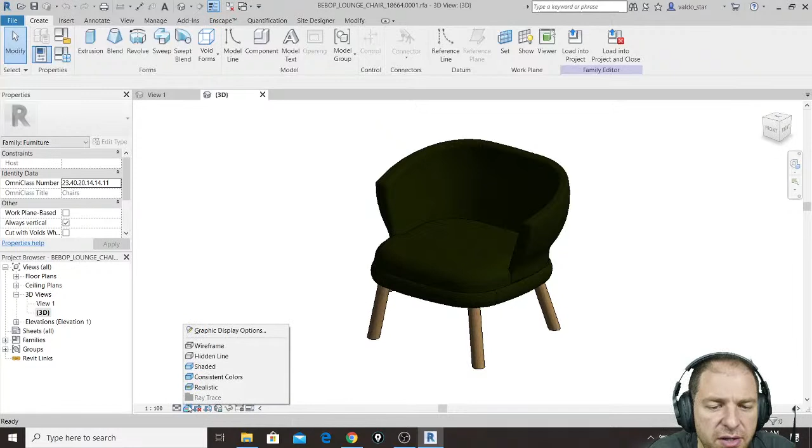Where is the problem? The problem is that when your classmate uses this object in a floor plan, the thing that happens is, look, in 3D, no matter what I change into this viewing style, it works. And the moment I go into a floor plan, in the object itself, it works, okay? But then when she uses it in a project, the object doesn't work anymore.

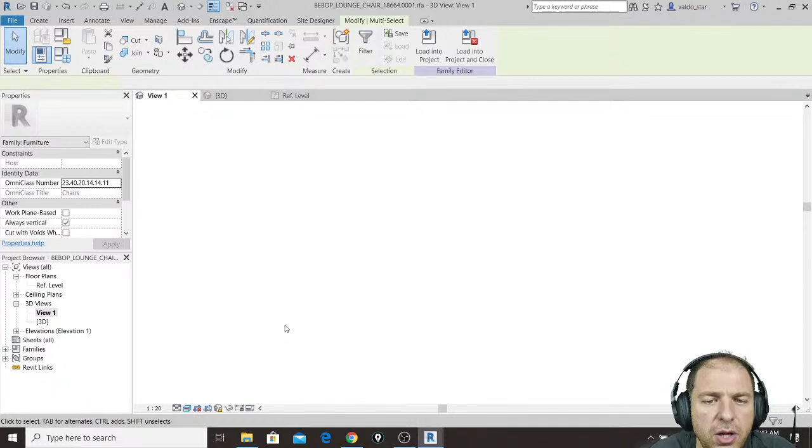So the thing that I have done to fix it is, simply, by going to a 3D view, I have selected all objects that are basically grouped inside this armchair. And the only thing that I have done, let's see if I remember exactly, I have to go to this. Look, I have selected all objects, so all solids inside the object. And there is something weird that I don't know why the person...

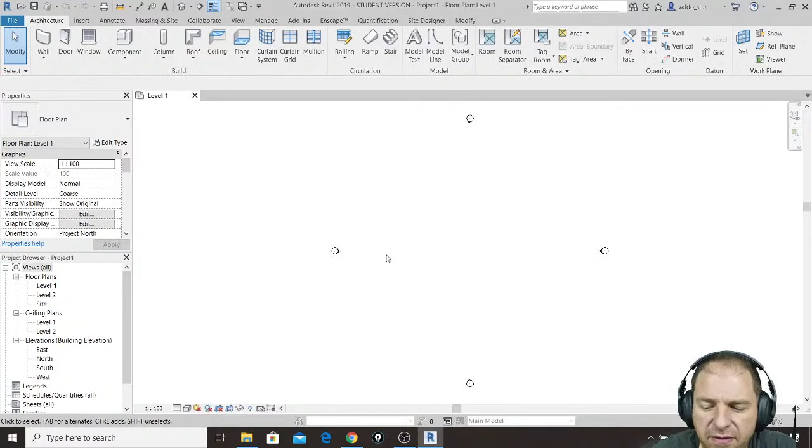And I save now my updated family, so let me just make a new project. The problem that this object was having was that when I make a wall, and when I make other things like a floor, it happens this: when I am in floor plan, if I change my visual style, even my floor plan correctly changes its look according to this.

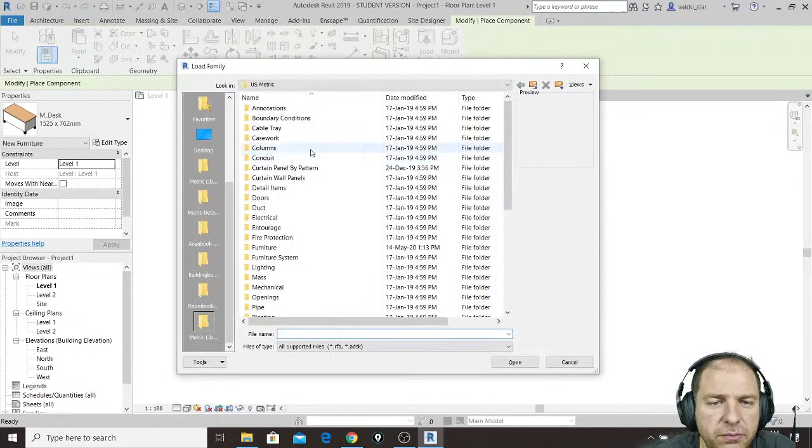The problem that object had was this: by loading that component from downloads, this one, and I place it here. The problem that this object used to show was that no matter which style you change, the object was always displayed in floor plan only as a 2D symbol. Now, by having also checked that I want to see it as 3D, if I change the visual style of my floor plan, it also correctly works even with this object.

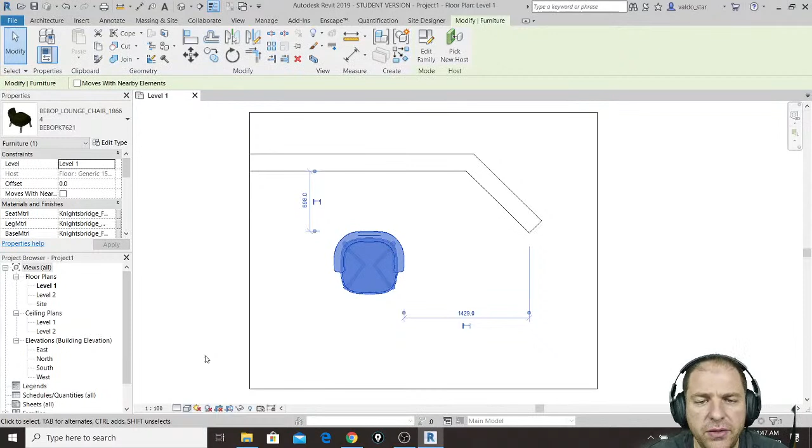These things can happen when you download objects, because maybe the person who made this knows that he will just make a black and white floor plan, so simply to keep the file lighter, he has on purpose selected the fact that he is not interested in having colored furniture, so he wants to keep it as a 2D symbol. Fantastic, isn't it?

And so, if everything works before another catastrophe happens to my internet, or before my phone dies, I want to show you what we have to learn today.

That is, we need to learn how to be able to professionally and in a very interesting way print our projects. And this is made by using a technique.

So let me open this file, even if no, let's open a new one that I haven't used. This is still there, perfect. So this is just a project. Technically this is one of your midterm.

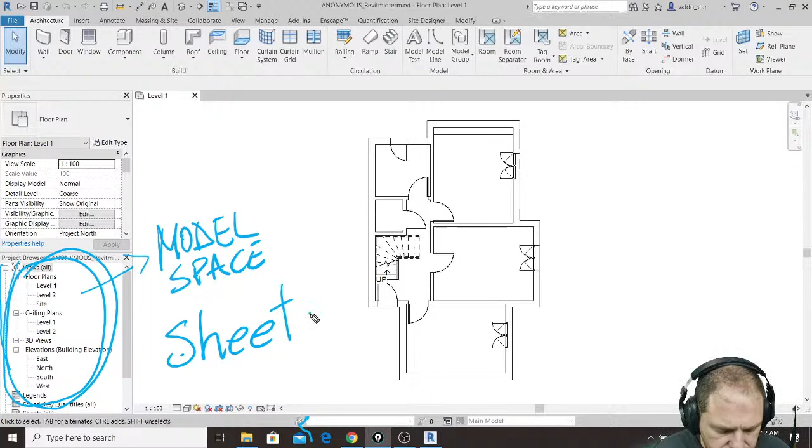In Revit, the paper space is called sheets, and you will find these by scrolling down a little bit in your menu, where you will find a folder called sheets.

How does this work? It's very simple. You can see that this folder is empty because it has no plus symbol next to it. So what we have to do is create new sheets in here, and also understand the method that Revit uses to let us set the size of our sheets, and the title block that is already available.

So, step 1, when you want to make a new drawing, you right-click over Sheets, you click New Sheet, and here you get a dialog box giving you a first default choice between no title block, so just a gigantic white empty space, or you can choose a title block right now, which also includes a page size, in this case A1.

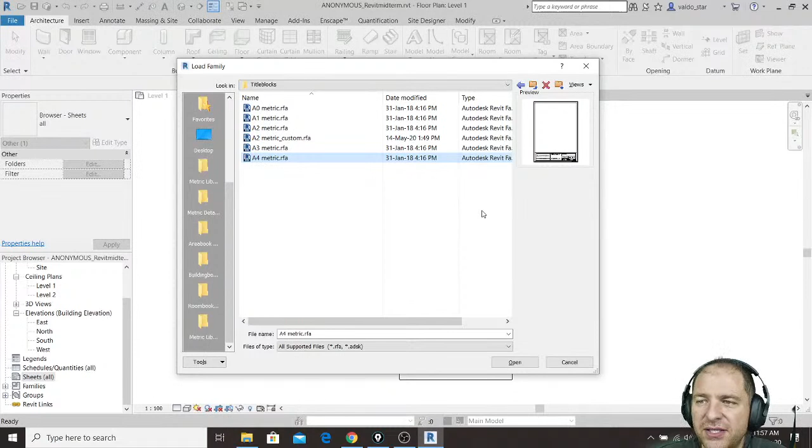First of all, let's choose one existing title block. We can customize it later on as we want, but we will just start with an existing one. So let's say I want A2, click OK, and I choose A2 metric to make my new beautiful empty drawing.

And you will see these phenomenal things happening: now in your Sheets family, you can see that there is a plus next to the folder, meaning you can open it. And you can see that we are now on this view because it is highlighted in bold text. Now this is our layout, basically.

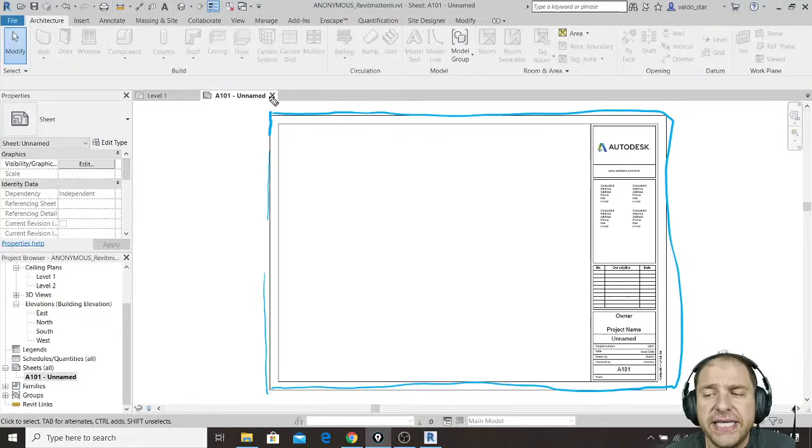The thing we need to simply understand is this: the title block that we have loaded is not only a title block. What it contains is this external rectangle that is basically our paper size. So this is the A2 size, the area that says what we have to print.

In here we have to understand a few things. The title block itself is basically just a 2D block that is made, believe it or not, with just 4 kinds of different objects. So into the title block you find only shapes, whatever this line, this line, this line are - those are shapes, but they are 2D shapes.

Then you can find pictures, and you can see, for example, that there is one picture right now, this logo here, that by the way is the Autodesk logo, not even our own logo.

Then we have 2 categories of written objects that at first look appear the same, while they are not: text and labels.

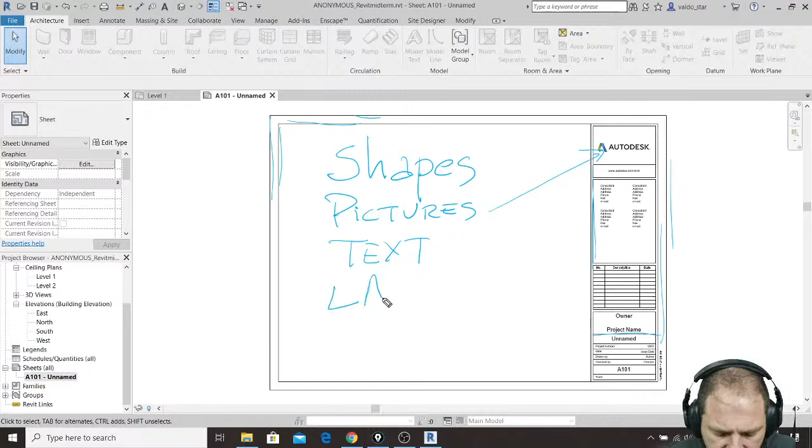What is the difference? The difference is basically that text is pure plain text, so it's something that is written and fixed, and if we want to edit it, we have to edit the original title block. We have to manipulate the title block, and whatever we change into text will affect all other title blocks that we have placed.

If we have labels, for example the number of the drawing is a label, that is dynamic text, so we can edit layout by layout. The number is a dynamic text that changes according to the real order that we are creating our layouts. So the more drawings, the more sheets we create, the more this number will change. The first one will become 1, and then if you make a second one, it will automatically be called 2, and so on.

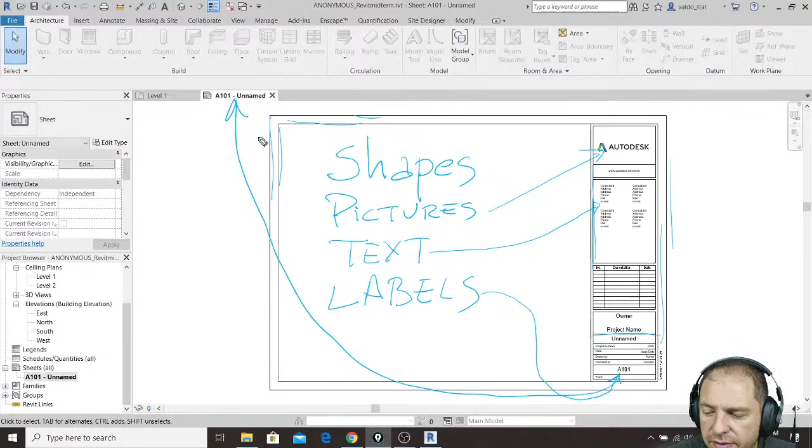Before showing you how to place drawings inside your sheets, I want to show you how to edit the title block itself, because there are for sure some elements that we want to remove.

Instead of starting from scratch and making a new title block, an easier way to manipulate title blocks is to select the existing title block, and then by going to the Modify tab, we can click Edit this family.

For a second, we are not in our architectural project anymore, but we are actually editing our A2 metric title block. By going inside the block itself, we can really realize that these are just lines - they are just 2D shapes.

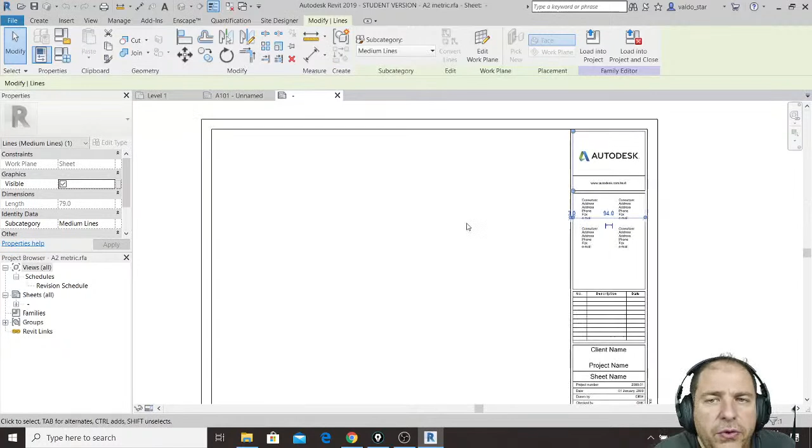Just for you to check, this is A2. A2 is 594 millimeters by 420. Let me see if it is right, because if I measure from here to here - boom, you can see that it is true. So the outer rectangle is just my paper size.

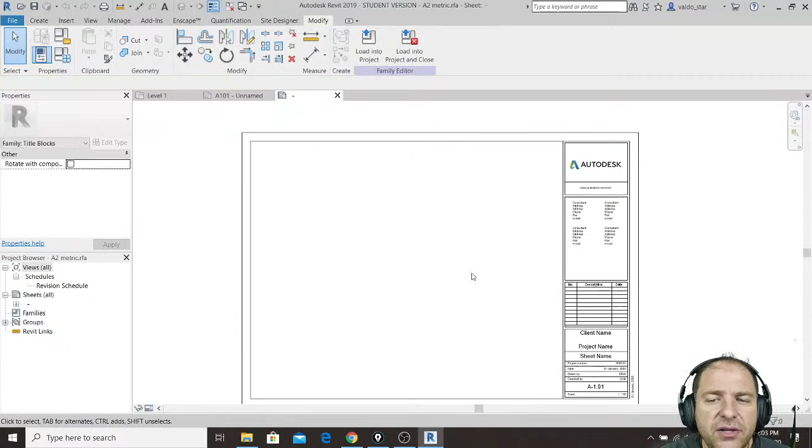The inner rectangle is what is technically called the safe frame, so my really printable area. And what I can do in here is start manipulating whatever I want inside my title block. For example, start from here.

Am I a person from Autodesk? Of course not. So I don't want to leave the Autodesk logo in this title block. So the first adjustment I will do is select the image, hit delete from the keyboard, and remove that picture. But I can have a logo, my own original beautiful logo.

Let's say I have this picture that I've downloaded - this is not mine, it's just a simple free template. So let's say I crop it, maybe like this - oops, a little bit too much. Okay, let's say this is going to be my own logo, and I save it.

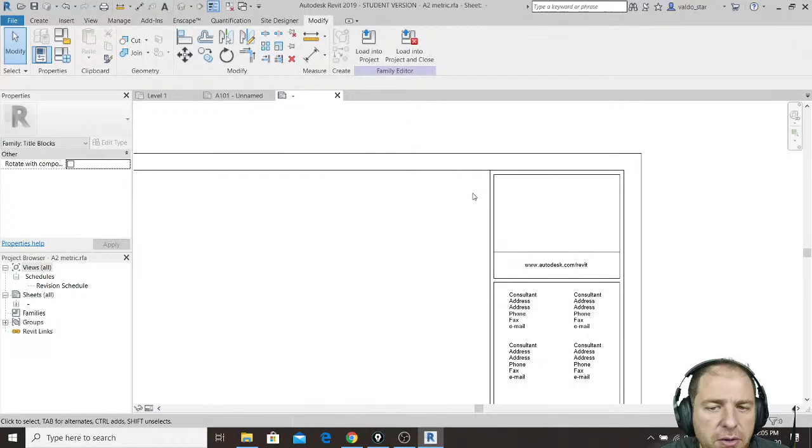So what I can do inside my title block, where I am now, is click Insert, click Image, go to the desktop, and choose the picture that I have cropped, then click Open. Boom! And I have my beautiful logo, placing it here for honestly, no real reason.

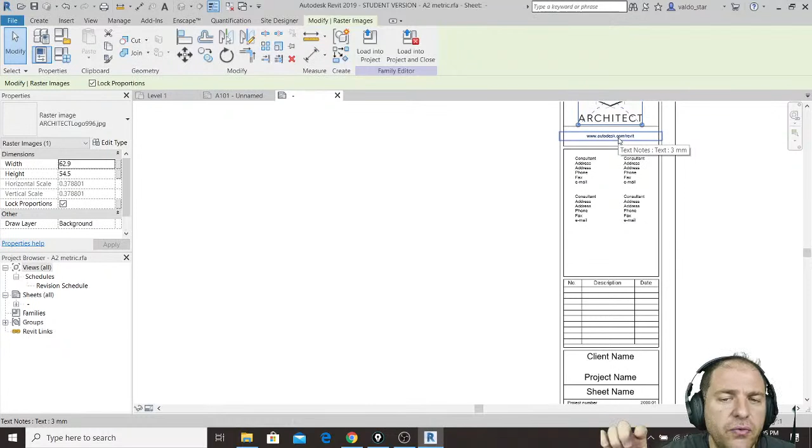I could place it, for example, instead of having all my information on the side, I can move them to the bottom of the page. You're free to adjust the title block as you want.

For example, I will change, instead of using this website - this is a text, as you may read from the properties. So I select the text, left click once inside, and I will place my own website.

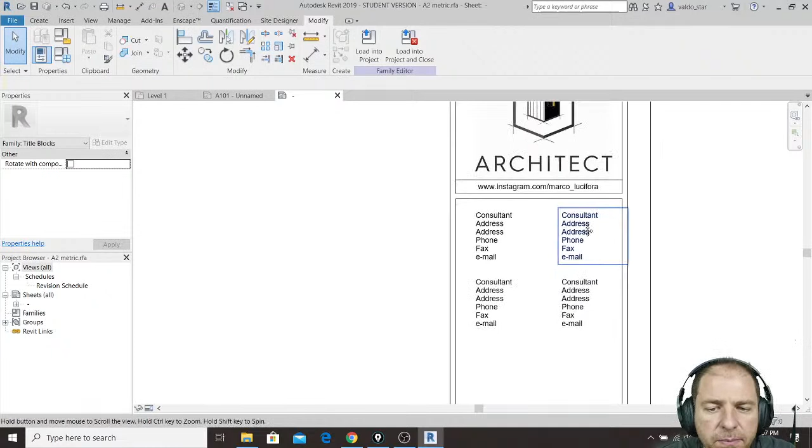For example, I know that I have no consultant because I will work by myself, so this text - boom - can be deleted. Or maybe I will instead edit them, and leave just one so that I can add more of my details.

So how to contact me, my telephone, like I will write - of course this is not true, you thought I was giving my own real telephone number - the way where I have my studio, or let's use the school one.

And so on. I can make the paragraph bigger, so I can basically start adding more and more details. And for example, I will place details in here, so select this, move, I will move it up.

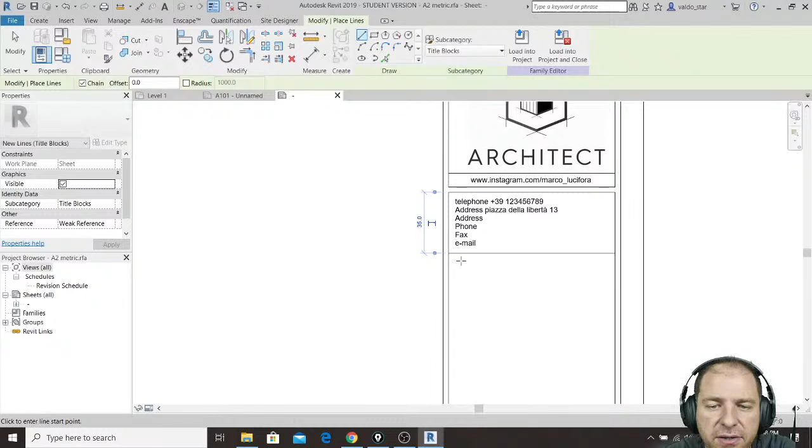If I want to cut this section, I can go to Create, and create lines, for example, and I will simply add a line in here, another line there, and exactly as I do with any other shape, I can split this line, and I can use trim to trim.

Perfect, and then trim. Lovely. For example, okay, so I can modify.

Just one last simple thing: in Italy, architects and engineers have a round stamp. So I can add it. I go to create, add a text, and here I will add something like 'stamp and sign for approval,' just to understand what this field is about.

If I want, I can also change the look of the text. I can select the text, change the type, make it 5 millimeters, or change the font, make it bold, click apply. But this will change all other texts that have the same style, like it changes walls.

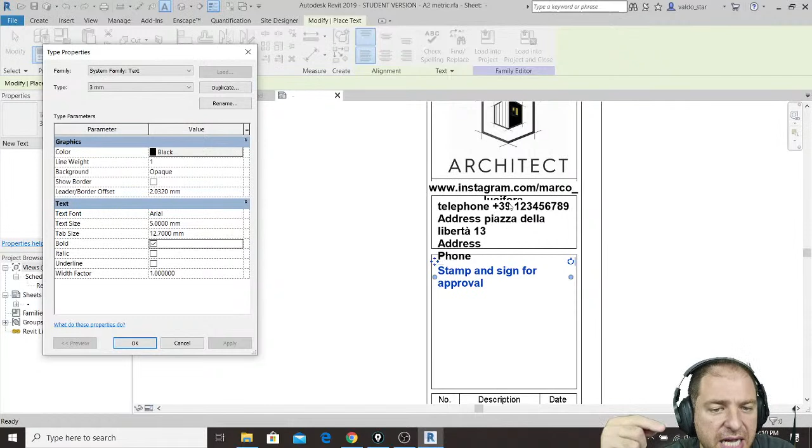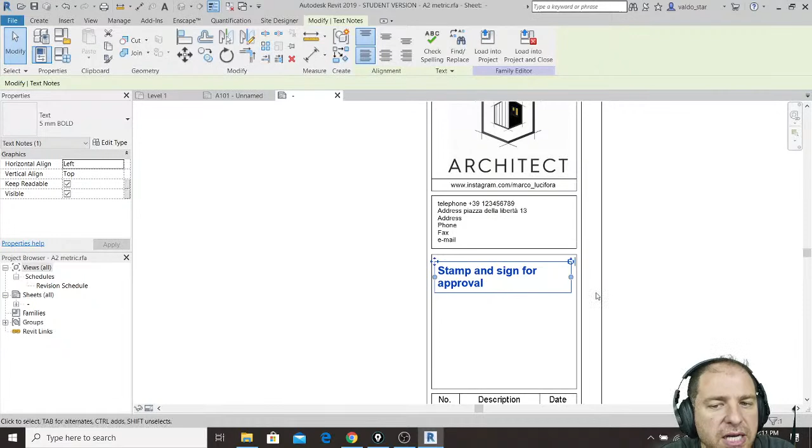So even in a simple 2D, I will set this back to 3 millimeters, apply. Even here you can do something phenomenal, like duplicate and make a new text style called 5 millimeters bold. I will make it 5, make it bold, click OK, then select these, and tell it to use the style called 5 millimeter bold instead of the 3 millimeter one, and it will just change this one.

And because in Italy we have round stamps, for example, I create a line that technically just means shape, and I will just draw a circle. I should give the radius the right dimensions, but more or less it's correct.

And I can make my own template. Last but not least, instead, are these fields. These fields are labels. What it means is that if you don't change them, they show you just the name of the label itself, but when you use them inside the project, they can be dynamically adjusted. Let's see what this means.

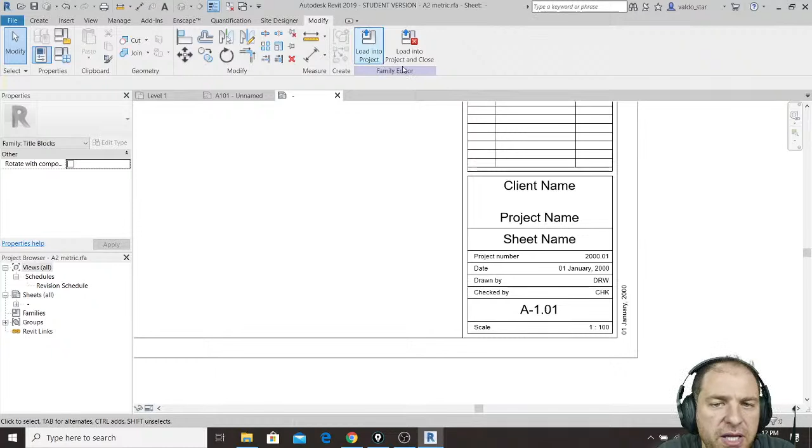Now I am happy with these, so I click load into the project and close. I don't want to save my original A2, so when it asks do you want to save, I click no. No, I have to click yes. No, what a mistake—anyway, I wanted to save as with another name, but it's okay. So now I have these.

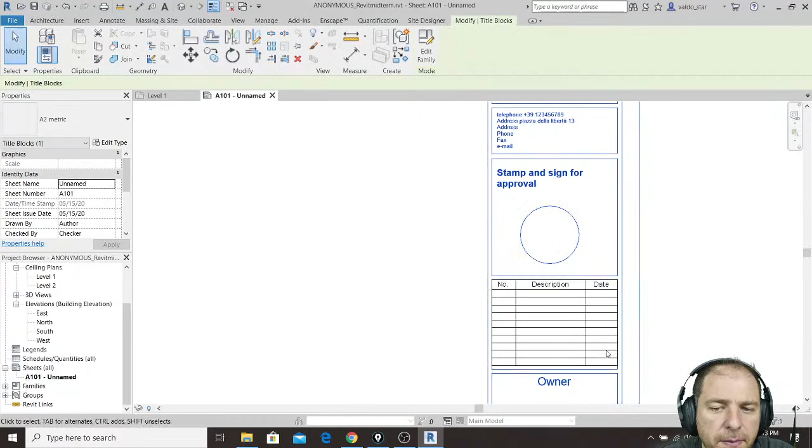This is my layout. See these? These are text, so even if I left click, they stay like this, they don't change. These are labels instead, so what I can do with labels is select them with one left click, and I can dynamically adjust what is written inside the label, layout by layout.

So I can have the owner, myself, project name, for example—this is the table, it will be like for floor plans. Project number 1, drawn by me, checked by who else rather than me, okay?

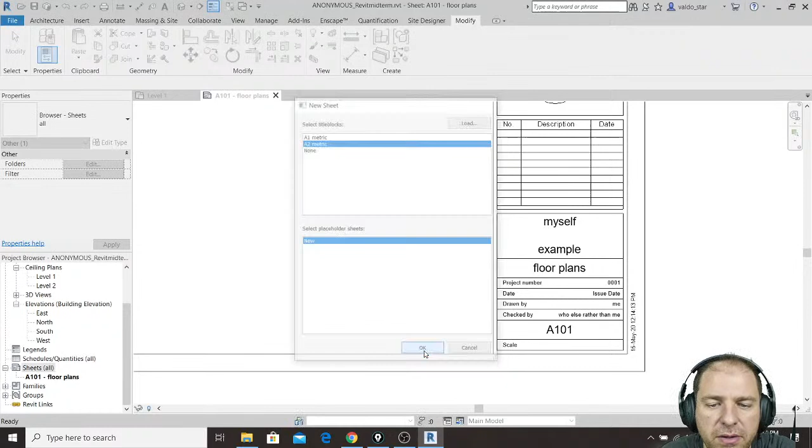And this instead is a label that will change automatically. Look, if I go again to sheets, right click, click new sheets, and use the same title block, you will see something interesting: my second title block has everything that looks similar to the previous one, so I get a consistent look to all my drawings.

Certain fields are the same, so if I change the text in one, I will change the text in all of them. Certain fields, like the name of the drawing, the number of the drawing, the author, and the checked by, can be adjusted drawing by drawing, as well as the scale, for example.

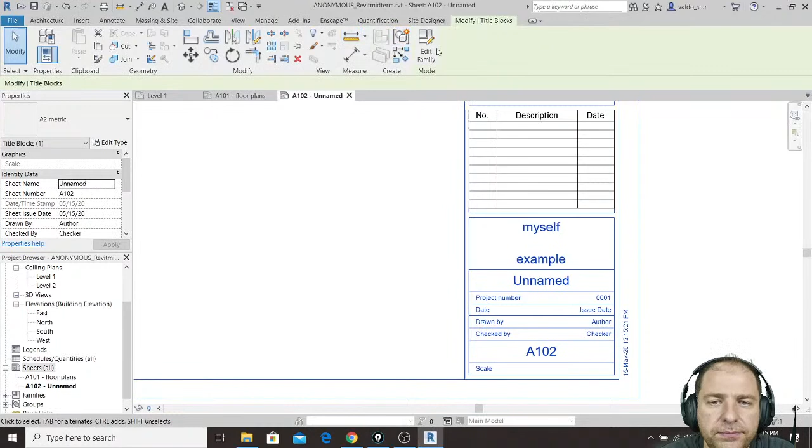Okay, so labels are dynamic text fields that you can edit as you please, or if you honestly don't need them in your layout, you can edit your layout. If you don't want, let's say, the project number and the date, because the date is written here, and checked by, you just select, delete, select, delete—whatever is not useful, you can delete it.

You load into the project, overwrite, poof, and you will see that from all drawings using the same title block, that information has been removed. Till now, is this clear? Because this is how to manage the title block itself.

Now we have to finish by understanding how to add our model views inside our project. But till here, is it clear or not, or do you have questions?

Perfect. Perfect. Very nice.

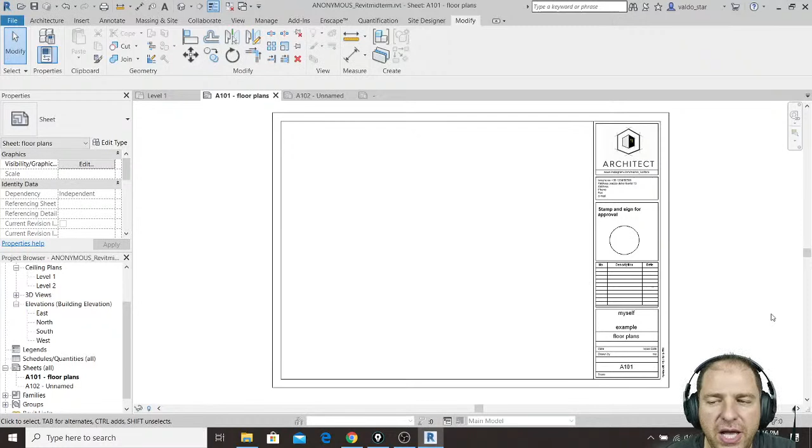Let's view now this phenomenal way to add drawings. Now we have, if we want to create our own title block...

In my honest opinion, the way to create a new title block is this: you go to your folder where your library is. There is always C, Program Data, Autodesk, RVT, and then the year of the Revit that you're using.

Go to the library that you use, find the title block that you want to start from, and an easier way to make a new title block is you select it and start by using this. You copy and paste a copy of an existing title block, double click to open it, and if you want you can delete everything and start all over.

So if you want to make, let's say, a vertical one, what I will do is start by deleting these shapes. So can I delete them? Are they pinned? Probably. Or it's okay, let's delete these, for example.

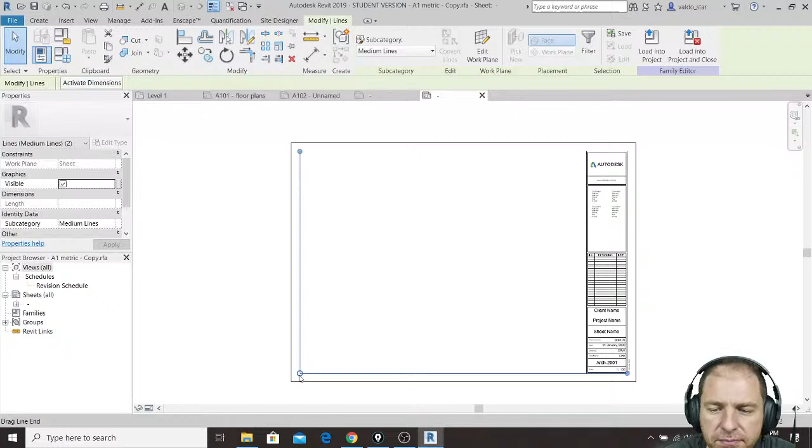Then I will change, for example, this. I will delete, oops, I will delete these, exactly. And then I will change, for example, the size. I want to make a vertical, what is this, A1, so these will become, let me remember, 840, perfect. These become 594, and for example this starts by being my new A1 that is completely empty.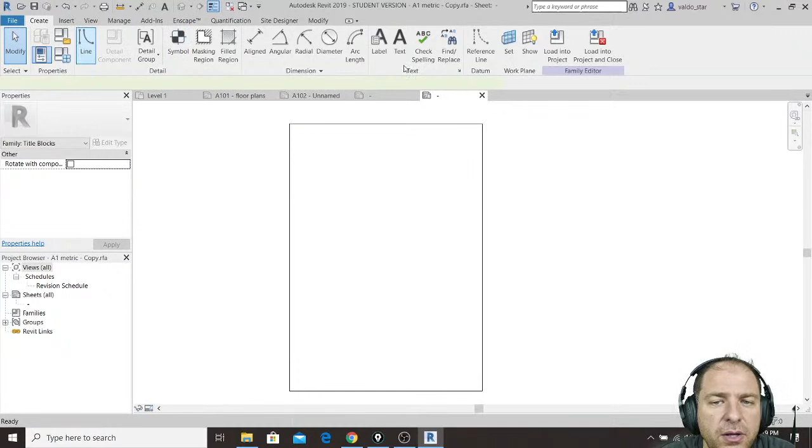Inside here you can start by creating, for example, frames like this. Completely up to you. You can place things in here. You can add, you can delete this line. You can make circles. You can draw things like that, where you will write your name, your logo, and whatsoever. Of course, yes, you can create.

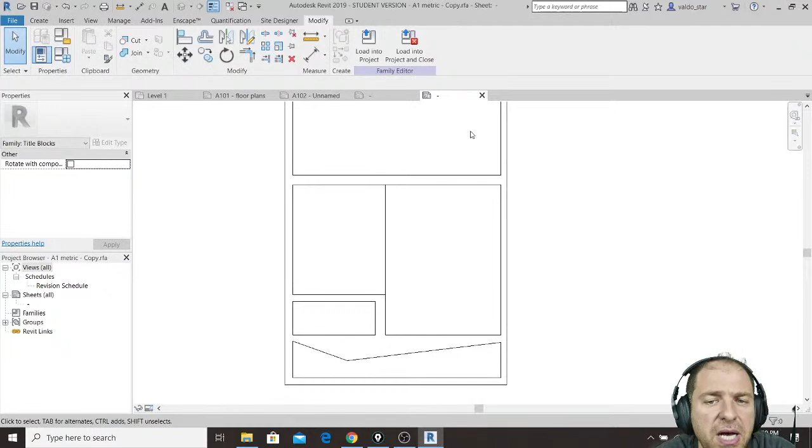The easier way is by copying an existing title block and starting from there. Okay? Was it clear? Yes, it was. Perfect.

These sheets can be printed as both JPEG and PDF. No, absolutely not. Because to print your drawing, you really need to print them with your installed printers. So if your printer has the possibility to print in PDF, yes. If you have a printer that prints in JPEG, yes, but not directly from AutoCAD, from Revit.

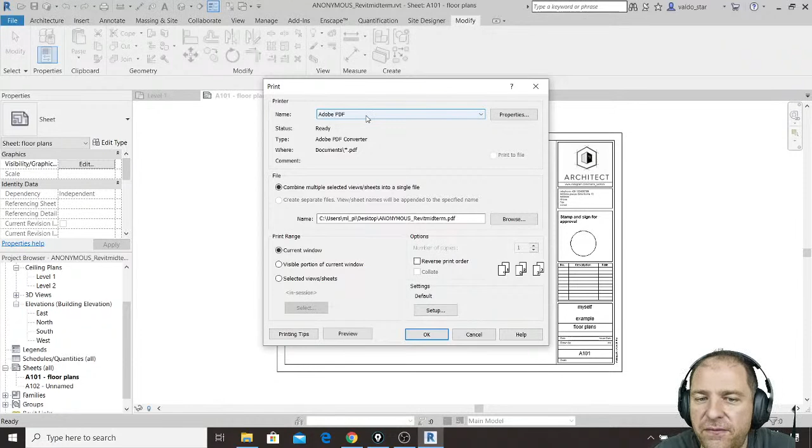If you want to print something that I will explain in 2 seconds, but I will explain it now: you have to go to File, go to Print, choose which printer you want to use, and let me laugh now, just a bit, because I want to show you that by having the official, original, 100% legal Adobe Creative Suite, I have my Adobe PDF printer.

So this is, these were A2, if I remember. So I can go to the properties of the printer, choosing the layout, advanced, paper size. Oh, how many paper sizes I have. I can choose A2, click OK, and in this way I will print my A2 drawing into A2 format, and it will be PDF.

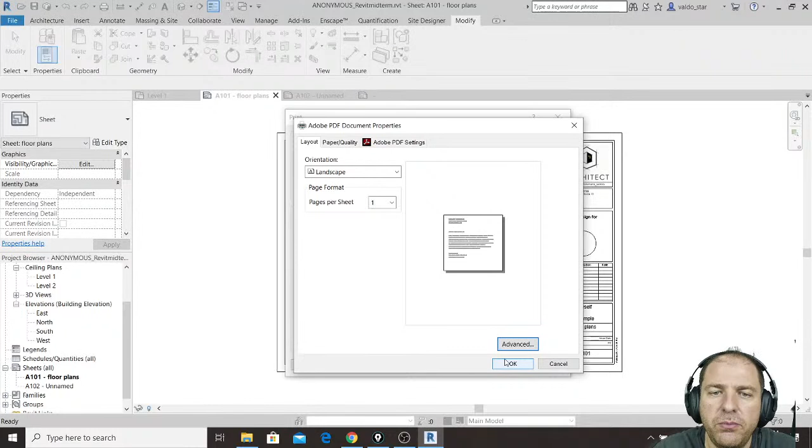Also, what Revit allows you to do when you print with virtual printers is that you need, not also because you can, but you should really check this option. Where's the pen? This option that is called 'combine multiple selected views or sheets into a single file,' so that your presentation will be one PDF that will automatically contain all sheets, all pages of your project.

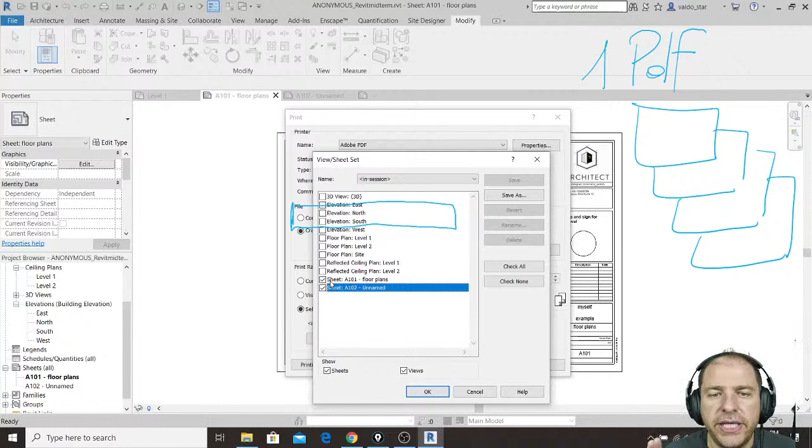And you can select down here which sheets you want to print. So you click selected views/sheets, you click select, and you simply tell that you want to print only the 2 sheets that I actually have right now. And if I click OK, yes. Okay. And if I click OK again, I will make one PDF that will be 2 pages inside automatically.

Just one side note: if you do not have the Adobe PDF printer, you have 2 simple solutions to quickly print all of your Revit sheets into PDF. Option number one, Windows 10 has a PDF printer, but the bigger format you can print with the Windows PDF printer is limited to A3.

But this is for free, and it comes with Windows. Option number 2: I don't want to open the website because it will slow down my connection, and because it is working, I don't want to risk it. You can Google and look for, we'll just write it bigger, a free alternative called, right here, BullZip Free, take care, PDF printer.

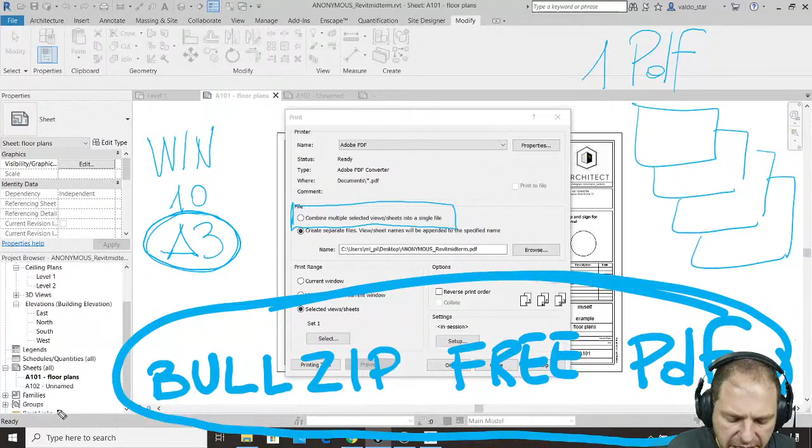You Google this, and once you install it and open Revit, you will see that by opening the menu of your available printers, there's a new printer called BullZip Free PDF. It works like the Adobe one, so you can have as many paper sizes as you want, and it will work as good as Adobe. Okay? Yes? No? Tell me.

But this is how to turn them into PDF. If you want to make it a JPEG, open the PDF into Photoshop and save it as a JPEG. That's faster.

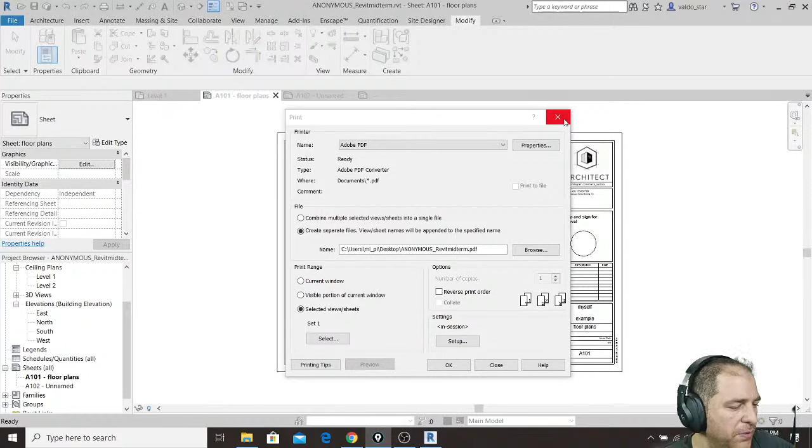Lovely, very very good. So now, let's see how to place views of our project inside the drawing itself. And this is not that hard. It works in this very simple way. There is also one trick that I want to show you about this.

There is something phenomenal. First of all, to add a view to your sheet, you have to right-click on the name of the drawing, the page basically, and use the option called Add View. By clicking Add View, you can choose between all these available views.

To be added inside your layouts. And if you see, look, I have one 3D view. They are listed by alphabetic order. Then there is elevation east, north, south, west, floor plan 1 and 2, floor plan site, and then I have reflected ceiling plan level 1 and level 2. Basically the list here perfectly matches the list of views that you have inside your project.

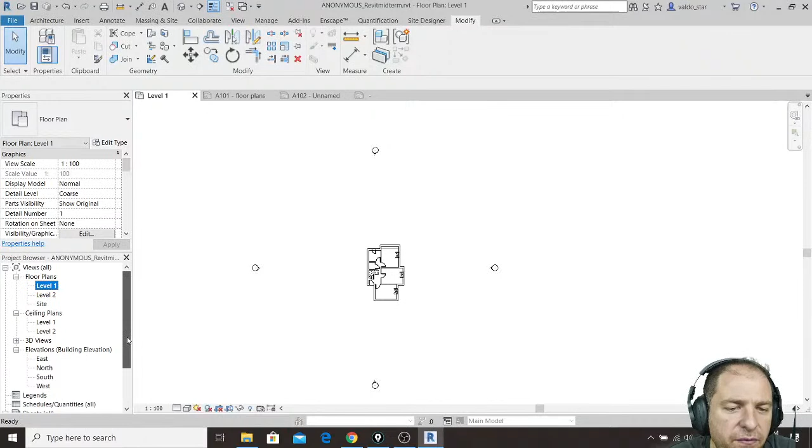But basically, if I go to level 1, this is exactly everything that I can see inside my level 1. And if you're trying to ask me, Marco, can we crop these? The answer is you could, but you shouldn't. And I will show you why.

What you can do in Revit to have a lot of flexibility and be able to create extremely interesting and complete looking drawings, is you need to know that views from your views menu can be duplicated, and view by view you can have unique properties for a view.

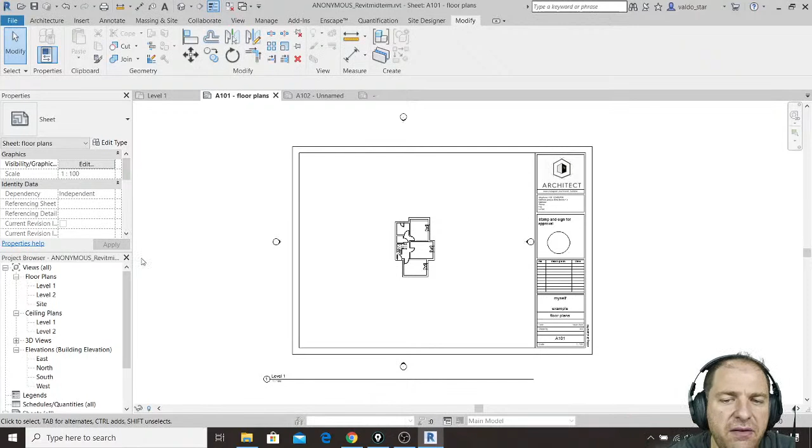I select my level 1 and right-click on that, then I start by clicking duplicate view. I go to duplicate and forget everything else, just click duplicate. So I start having a copy of my level 1, and I don't even like the name 'level 1 copy', so I right-click on this duplicate and use rename, and for example I will call this level 1 cropped.

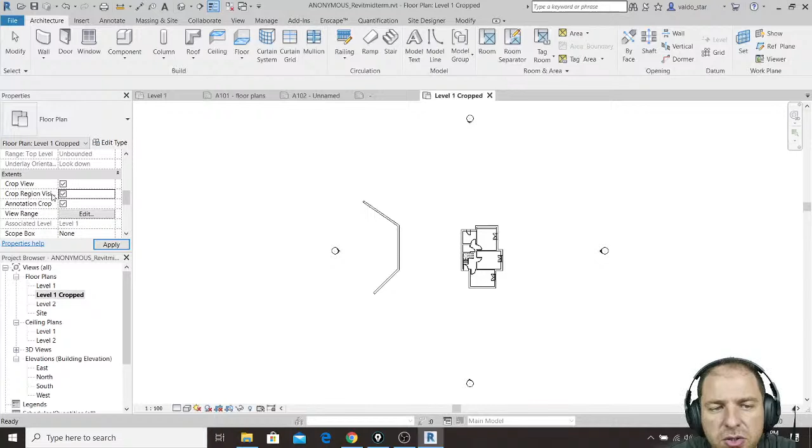This is why: imagine for example that we have another wall in here. But if I want, I can select my duplicate of level 1, and from properties of the view itself, I can enable these options called crop view, annotation crop view, and crop region visible. So whatever is cropped, I select all these three.

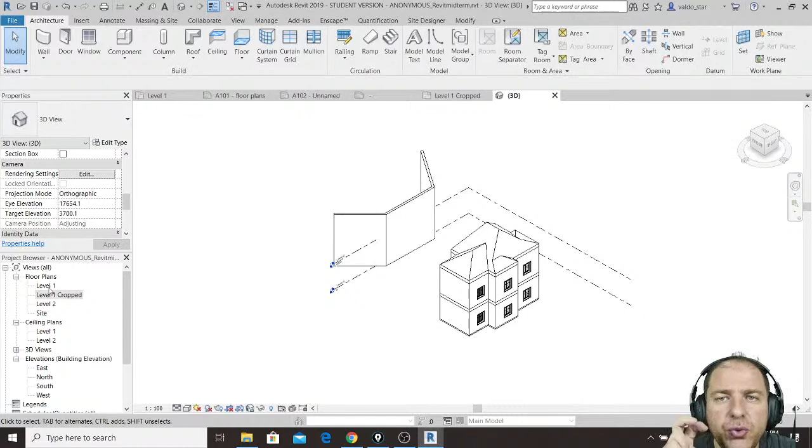And I get this rectangle that I can select and quickly modify so that I will crop just the inner one at least, but I will crop the view itself. And I'm not deleting that wall that is in reality existing, because if I go to 3D, I have that wall.

But I now have 2 copies of the level 1. Into my level 1 I can see everything. Into my level 1 cropped, I have cropped the view only where I really need. And I can add one slightly more interesting aspect into duplicating views: I'm not limited to cropping views with different areas. I can also use duplicates of my views to give them different shading options as well as different visible categories.

What does it mean? Look, for example, in my model, I want to add a bunch of furniture.

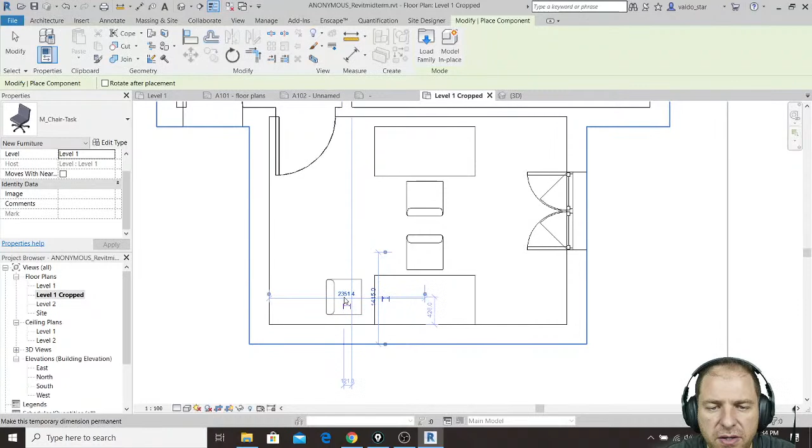Okay, let's load another furniture like a chair. Furniture, sitting, this one, perfect. And I will put a lot of these chairs here, there, perfect, another one here. Okay, so now I have my beautiful model that has furniture as well.

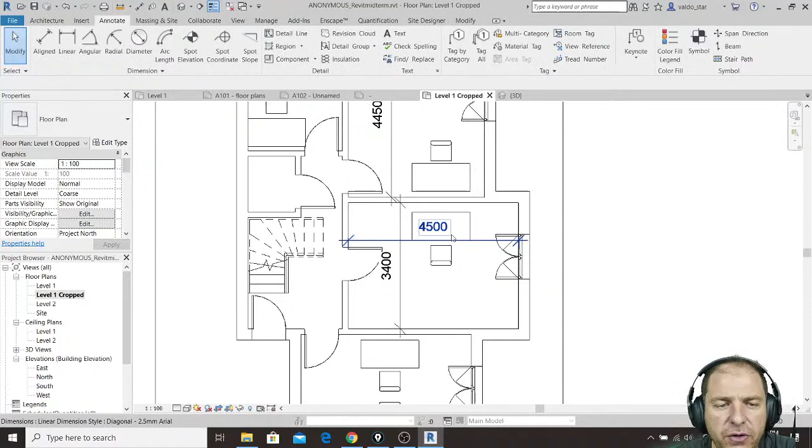And I want to make in my drawing, I can also go to annotate. I can click linear and I can put dimensions, for example. I will put this dimension here on purpose on top of the table. So where is the problem? The problem is that when I make my floor plan drawing, it would be really bad having both furniture and dimensions visible at the same time.

So what I can do is this: I can also duplicate again this view. I will rename it and call this one furniture. I will set the quality fine, I will select realistic, shaded, and I have a color version of my floor plan. While I go back to my cropped, I will rename it and call it dimensions.

And in this view, I will select one table, right click on it, and go to hide in view. Now you can understand why hide is called hide in view, because if I hide the entire category of furniture, they will be hidden in this particular view that is called level 1 cropped dimensions, but in all other views my furniture are visible.

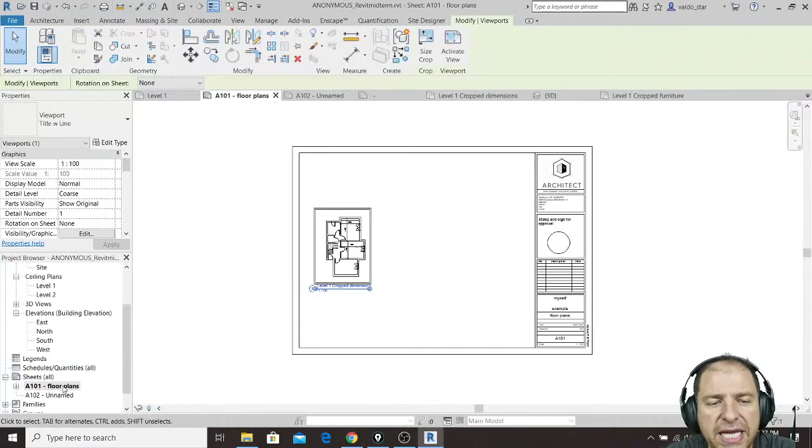So now that I understand that I can duplicate views, I have a huge variety of possibilities to create my layouts, because I can double click on floor plans again, right click, use add view, and now that I have added those two views, you can see my menu shows me those two options. So I can use crop level 1 crop dimensions, and click add view to the sheets. I can repeat the process as many times as I want.

Add view. Now I will add the one that is called cropped with furniture. And you will also see that it brings with it the shading and the level quality that I have set for that specific view.

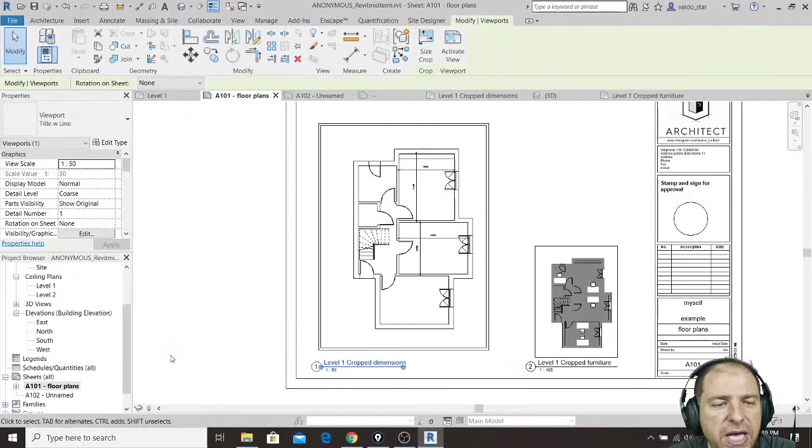And last but not least, if your views are floor plans, sections, elevations - so all orthographic drawings - or if they are 3D isometric views, you can easily select them, and from view scale, from the properties, you can immediately set at which scale you want that view to be. So in the same project, you can have this view here, this view there. You can add another view, and add, let's say, a west elevation. Because it is too big, I can change the scale. Let's say we'll make it 1 to 200.

And if you select the view itself, there are just a few things more that you can do. So if you select the view, you can also stretch this line that is the title of the view itself. Thing number one.

Give me a second, then I will answer to this question. But let me finish this.

Things that you can do with viewports are, you can crop the viewport itself, but can you see the difference between this elevation here and this floor plan? They are both cropped. There is one difference: in this one, crop region is not visible. In here I have this automatic rectangle that basically works as a frame for my drawing.

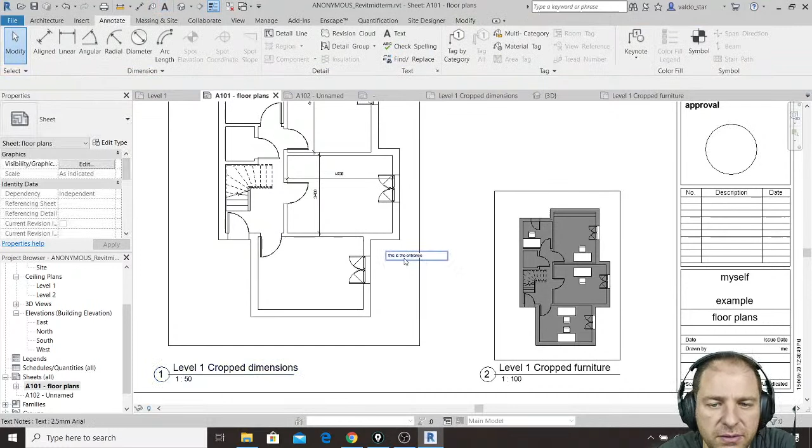But if I want, I can go here, and maybe I would like to write something inside my project. So let's say here I would like to write 'this is the entrance'. That will overwrite the thing. So line weight - yes, I have just disabled line weight, but if I enable it again, look, it is there. It is only for me, for visual purpose, that when I make the video I have disabled it, and it changes according to the scale.

And last thing that I was showing - sorry - is if you don't want edges all around your viewport, you can select the view itself, go to the properties and uncheck the second option. If you want me to read it correctly, it's called crop region visible. So if you don't want the rectangle all around the drawing, just uncheck this option, and this will hide the cropping rectangle.

If you don't even want the title, well the title is here, and you can move it, but you can't delete it or change its look. If you don't want it, edit the type of the view and find the option called 'Show Title', and say no.

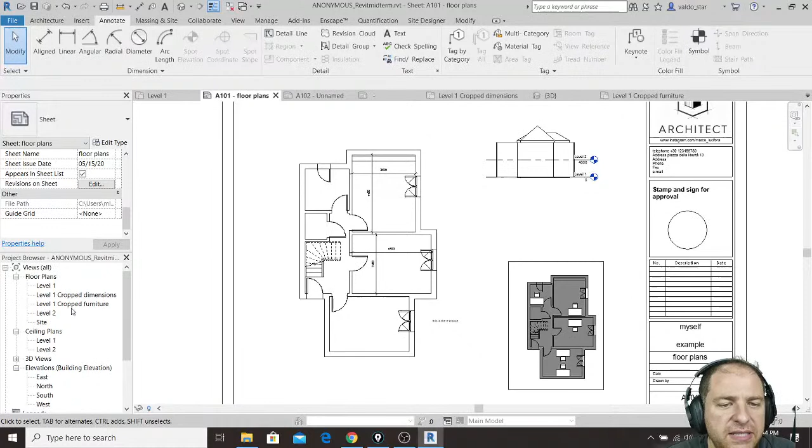Let me finish here, because I want to show you that you can add views the same way, like sections. You can add this section, you can add this section, you can add cameras. So you click next to 3D view, click cameras, and you can add a camera here.

Whenever you do something like this, you basically add new views to your project, and all of these views are listed here. Even the 3D view - look, you select this 3D view, and it's listed here. But just like any 3D view, you can right click and duplicate it.

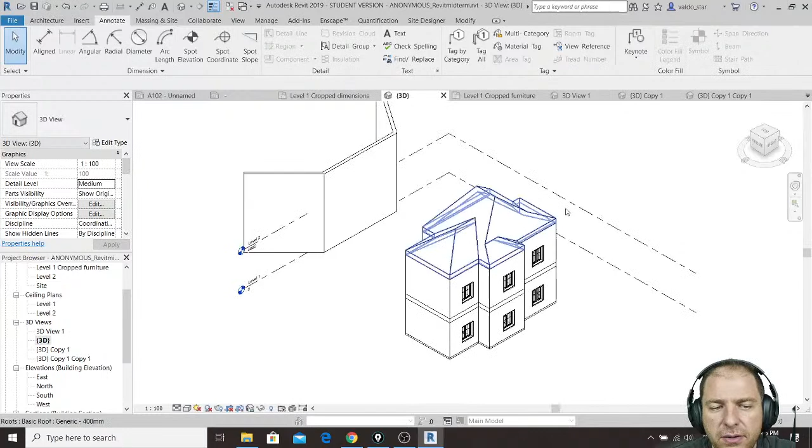So you can make this 3D view and then crop it, so that I can make a 3D view that shows just this side of the house. And in this 3D view, I don't want to see these dashed lines that are levels, so I can right click and hide them in the view.

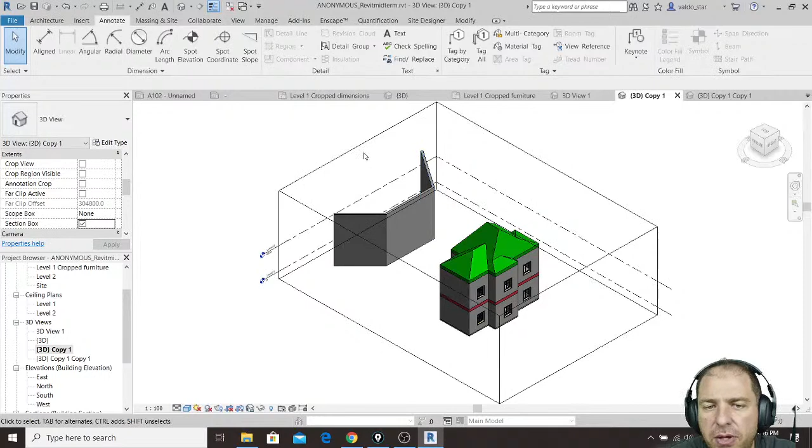In my second 3D view, I can make this shaded. I don't remember if I've already shown you, but probably yes - in 3D, instead of using crop, we can enable section box. If we enable the section box, we can select this box and have three-dimensional views that are also cutting our object.

I will change my section box like this, and in this way I can see how many walls are wrong in this project. Oh my gosh, this is terrible.

So let's attach and fix some of these. Just select these, attach, select the roof, select these, attach, roof. Glad that I renamed this file Anonymous, because it had a name, so I know who did it.

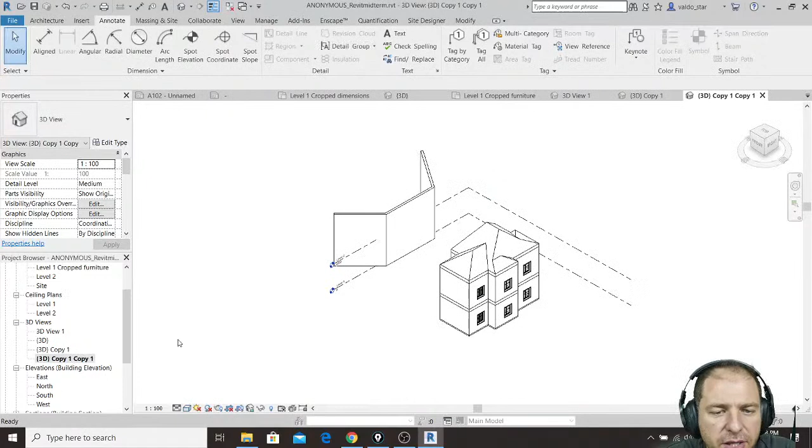So I have another 3D copy, and I can make another section box. I will crop this, for example, crop the top, why not. Then this, and then that, and then I select these and hide them by category. The only issue is I can also hide the section box itself, because if not, you will see what happens.

So now you can see I have a lot of 3D views, a lot of Level 1s, a lot of sections. The only thing I personally suggest is don't leave these names as they are, like 3D, 3D1, 3D, 3D1, because it makes no sense. I highly suggest right-clicking and renaming all these views so you understand what they are.

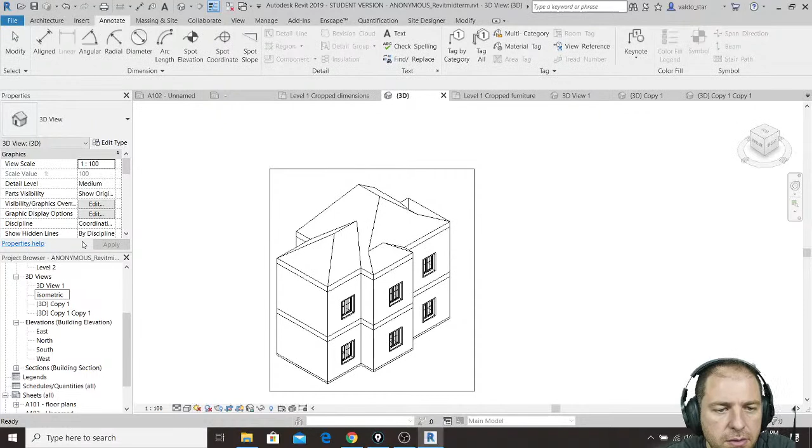You can leave '3D' next to the name at least, but for example, you can make this just 'isometric'. So rename it and call it isometric. You call this one... this is color section.

This is the black and white top section. This 3D view 1 is the camera, so you can rename it, and this will be camera stairs, so you have an idea of what your views are.

This is why, because when you go to your page and right click and click add view, you only have the possibility to read the name of your view. Another thing you need to know is that when you add views to a sheet, those views can't be used multiple times in multiple sheets.

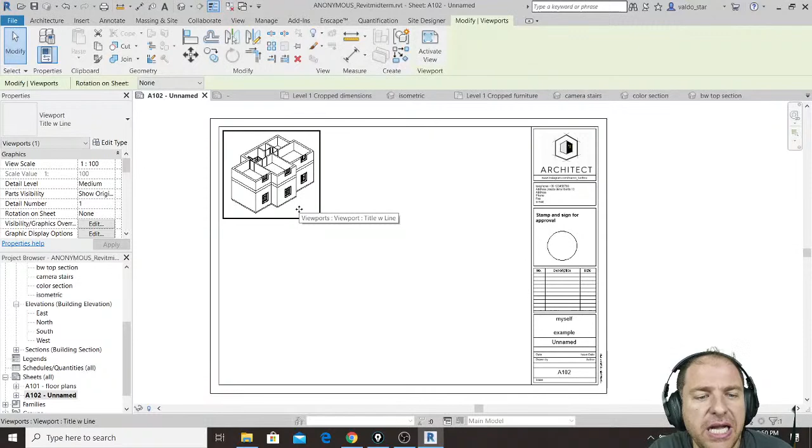So you can see, for example, that in this one I have already used elevation west, floor plan cropped with furniture, floor plan cropped with dimension. When I go to my second page and add view, you can see that floor plan level 1 cropped and floor plan level 1 cropped with furniture are not listed anymore. If you need to have the same drawing in multiple pages, you just have to duplicate the view as well.

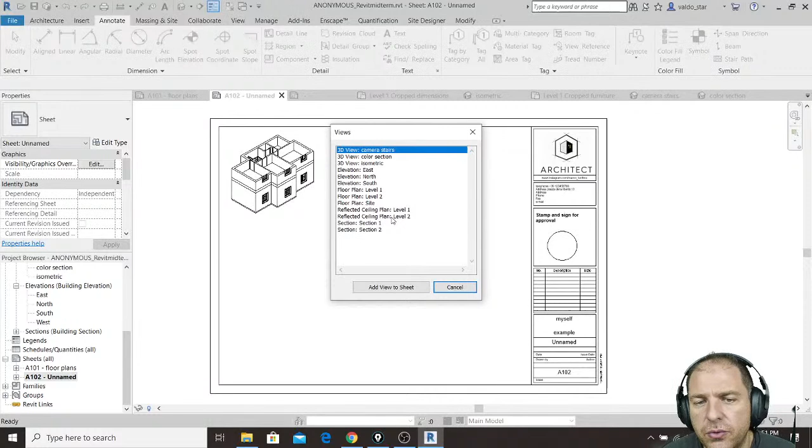So, for example, I will add the camera here and show you something fantastic. I will finish this, add view, another 3D, the isometric, perfect. And what else? There is another 3D view, color section. I will place it here for now.

So look at the difference between all these viewports. This is a 3D view and it's showing me colors, fine, section box, fine, but it's also showing me levels and the section box itself. This is why in this other view I have hidden those elements.

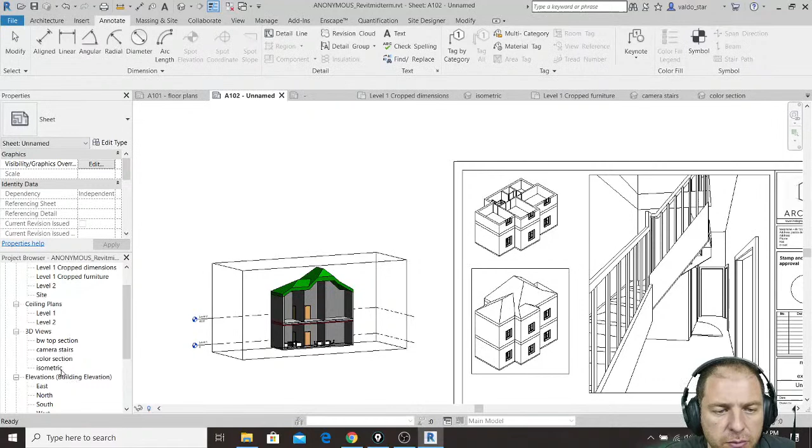But if I want, look, I can still do it. I just need to open these from views. So, color section, I select these elements, right click, hide in view, the entire categories. I hide them into the original view. I go to my page, boom, they are gone, and even the cropping area is gone. If it's not gone, you select these and simply uncheck crop region visible if you don't like it.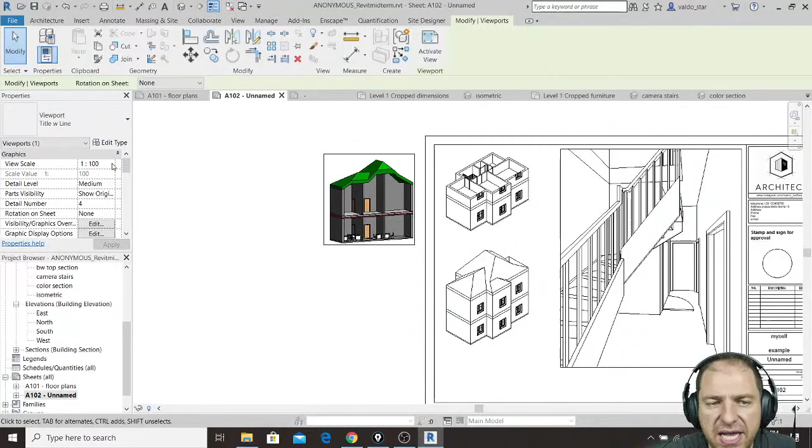3D views can be, and there's another thing you need to know, that isometric 3D views can be like floor plans or like sections - they can be made bigger or smaller, again by changing the scale. But look.

Maybe I just want to make these a little bit smaller because I want to fit 3 of them in here, and they should be a little bit smaller. Right now, if I select them, they are 1 to 100. I want them a little bit smaller, so I should increase the scale to show them smaller. But if I open this menu, I just see that after 1 to 100, I have 1 to 200, and that will make this drawing too small.

So you also need to know that for all of your orthographic and isometric views, you can change the view scale, but you can select custom on top, and if you want, manually type a number, click apply, and you'll discover that in this way you can shrink a little bit - let's say 110. Now this is a little bit smaller.

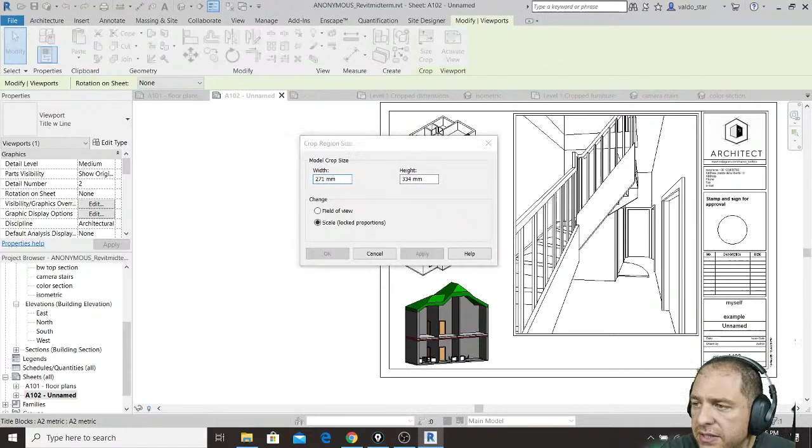So only for perspective viewports, and this is only for those, you have to do this slightly more tricky step. You select your perspective/camera view, click size crop, and instead of changing the field of view, so instead of cropping the image, you click scale, and you can adjust the size of the picture in millimeters. So what Revit is telling me right now is that this rectangle is, from here to here, 271 millimeters, and from here to here, 334 millimeters.

So if I click scale - take care, scale, not field of view, because if I change the field of view it will crop the image - but if I scale it, let's say I want it a little bit bigger, I make it 360, and I have to click apply. 360, apply, boom, and you see that viewport becomes bigger.

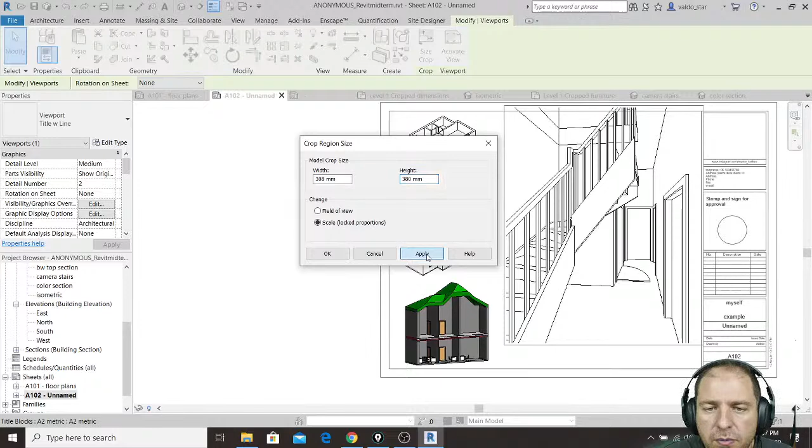I can make it 380, apply, okay, and now this has become bigger, and I can place it here. Fantastic! Look, what a drawing!

Then, like anything else in Revit, you can also use aligned dimension, because if you want to say, look, how far is this from here to here - this is 13, and here to here 15, and so on. Or you can snap things, so when you move your objects, you can perfectly snap your viewport, let's say, to the corner.

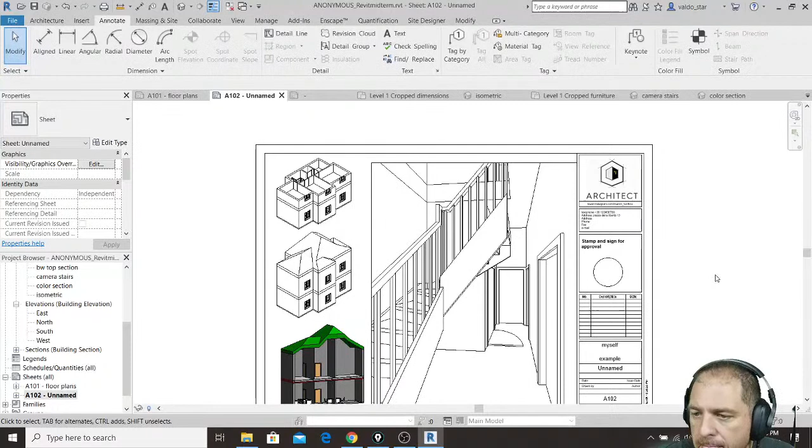So that it will perfectly touch that element. Okay? Till here, is everything clear?

Also, I just moved my face a little bit up. Oh, perfect.

So if it is super clear, I just need to show you one last thing, and that is how to add renders in your phenomenal printable sheets. There are two ways to do that.

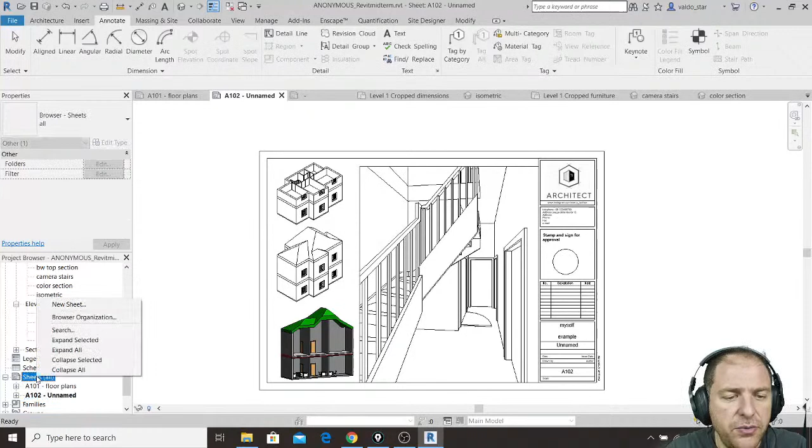Let's say I make a new sheet, A2 metric, okay. And you can see also that the number is automatically changing. Here I have two ways to place renders.

If renders are made inside another software, like 3ds Max, you can simply save your renders as JPEG, and then, let's see if I have renders somewhere.

Is this a render? It should be. Let me check it. The JPEG file. Why is it not opening?

Okay, forget about opening. So if you have just a picture, you can simply go to insert here, open it. No, it's not that nice as a render.

So wait a second, File Explorer, let's see if I have some renders. Quickly. Whoa.

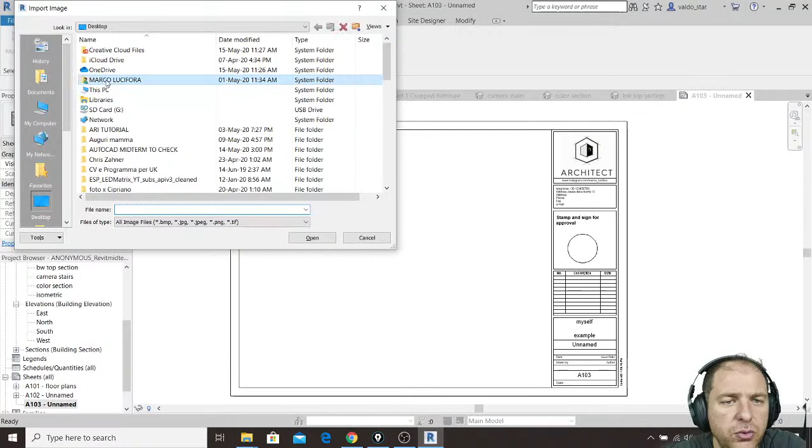It is in here. Okay, so you go to insert, image, you go to your folder where there should be pictures, and they are not, so I just place it into the desktop. Okay, insert, image, desktop.

The image is there, yes, this one. Boom, and you add your pictures as an external file, which is the only problem of working with an external file, and that's why I'm showing you this.

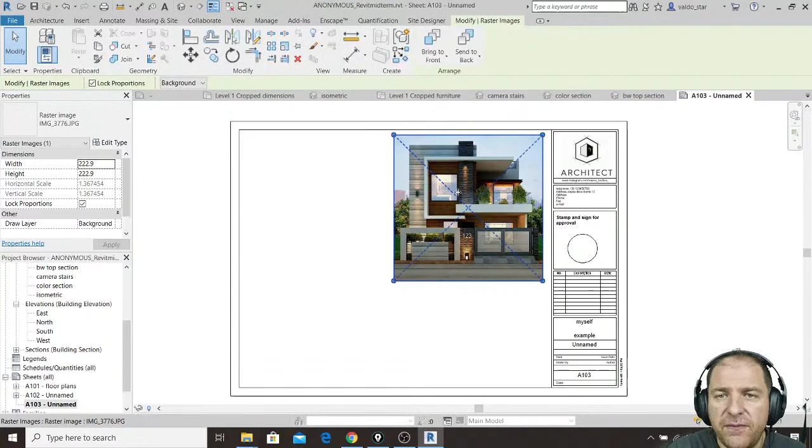The only problem will be that right now this is a link to a picture that is in my desktop. So what happens will be, if by mistake I delete the original picture from the desktop, or I move it into another folder, what happens will be that I will open my Revit, and in here I will find an empty spot. But if instead I render,

let's say this one, but if I render inside Revit, like this, if I render inside Revit, my render, perfect, not that great, but decent.

What happens is that when I make my render, I have two options: I can click export even from Revit, and I can save it as just a picture file, and it will be saved into my computer as a JPEG, a TIFF, and whatsoever. But I have a beautiful additional option when I render inside Revit: I can click the button called Save to Project.

If I save my render to the project, let's call it Render Marco, what happens is I'll have another folder view called renderings, and inside renderings I can always double click and find my render inside the Revit file itself. So I include the picture inside the file itself, and I will never have that possible mistake of losing the file here and there.

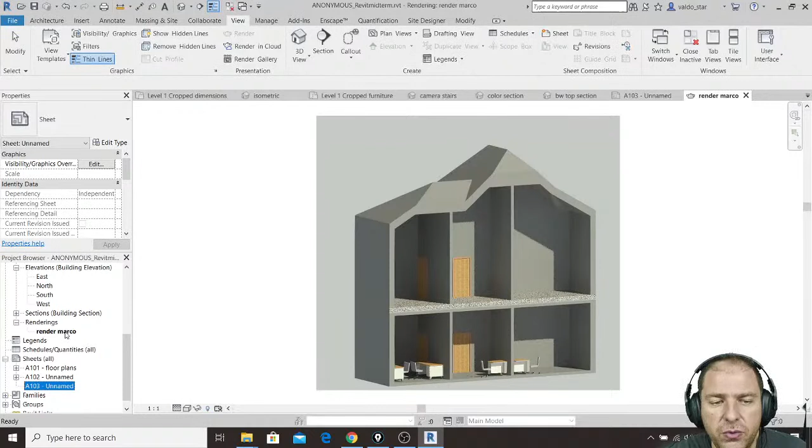And if I want to add it inside my drawing, since this is a view called render, I double click my page, right click, and add the view that is now my render, and place it wherever I want.

And this is the conclusion of how to make a beautiful, ready to be printed layout. And I can finally answer the question that has created suspense: Cosima asks, how many plans, sections, renders, drawings, elevations, sketches do you want to show? There is one answer only.

Put yourself in the situation where you need to imagine you are your own client, displaying your project to the client. So the number of elevations, floor plans, renders, sections, 3D views, cameras, whatever you create in Revit, needs to be enough to explain the entire project.

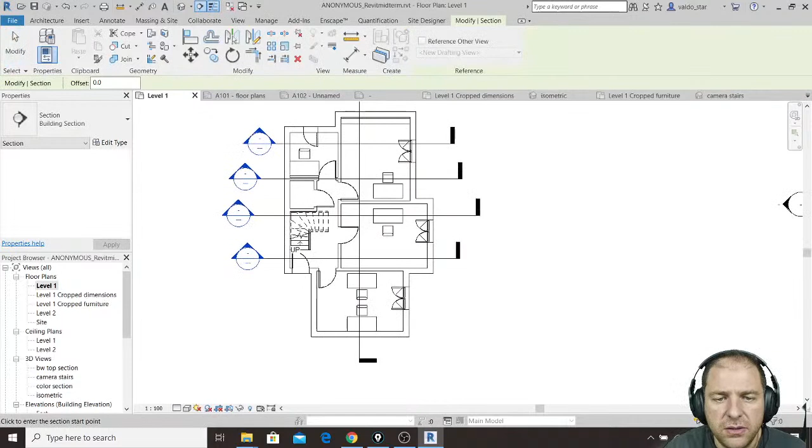You need to avoid problem one, having less information than enough to display the project, but you also have to avoid problem two: adding duplicates of the same information just because in Revit it's easy. So it's completely unuseful to start adding section 1, section 2, section 3, let's say all these sections.

Because they will tell you more or less all the same things. I know in Revit it's easy to just click section and make the section, but it doesn't make any sense. So to correctly answer the Cosima question, there is not a right or wrong number or list of drawings you should add — just place enough to display the project, and not too many, so the project doesn't end up looking full of unuseful stuff.

Is that clear? I know it's more like a philosophical answer. Maybe you'd like just a simple to-do list, but you are old enough to be responsible for the quality of the presentation of your project, without just following a checklist.

Was it clear? Perfect.

Also, while I wait to see if some of you have one last question, I want to point out something I really like. Because I have green eyes, when I look straight into the camera, my green eyes disappear because I use green screen. And this is creepy. Fantastic.